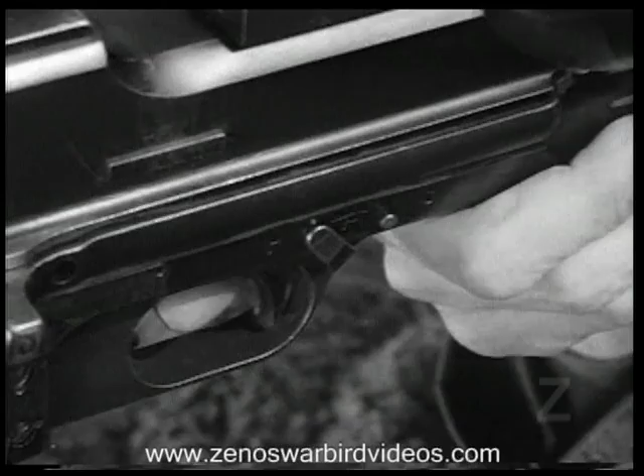You have to get down to facts, technical facts. The Browning automatic rifle, caliber 30, model 1918 A2, is an air-cooled, gas-operated weapon. It uses a 20-round magazine, and you can fire at a slow automatic rate, or if you flick this change lever, you can fire at the full automatic rate.

So much for the description. What we want to find out now is the principle of operation. To help us see how this weapon works, we'll use this cutaway model. Flick the change lever off safe.

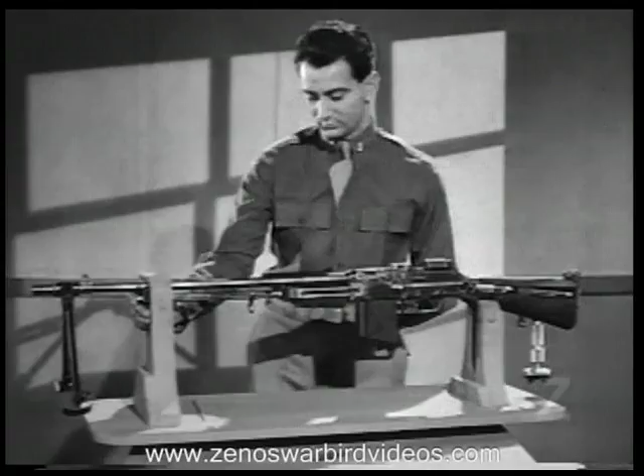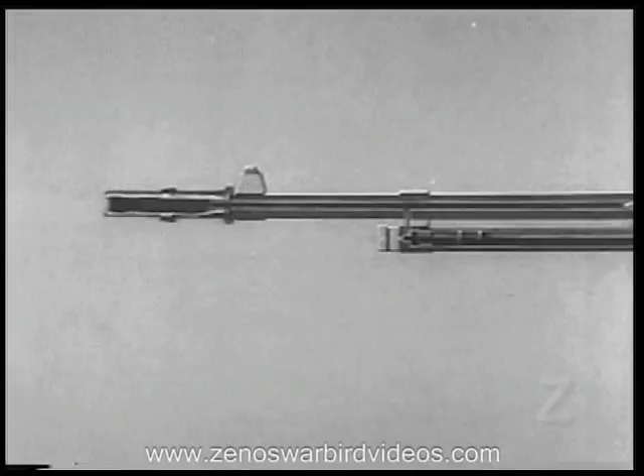We'll start the firing cycle with the cartridge igniting. As that happens, gases travel along the barrel and into the gas cylinder. Now let's use the animated drawing and follow the course of the expanding gases through those labeled parts.

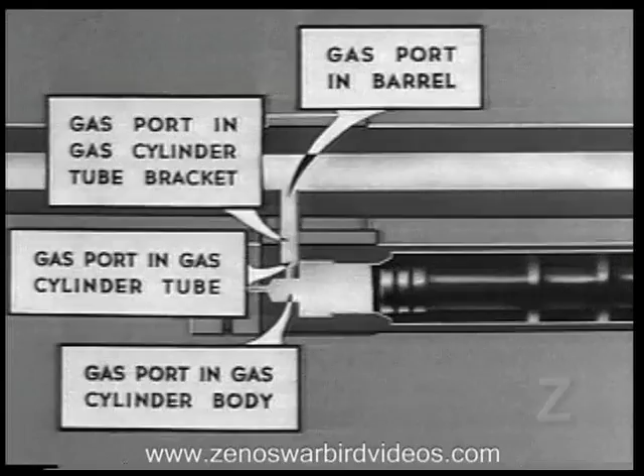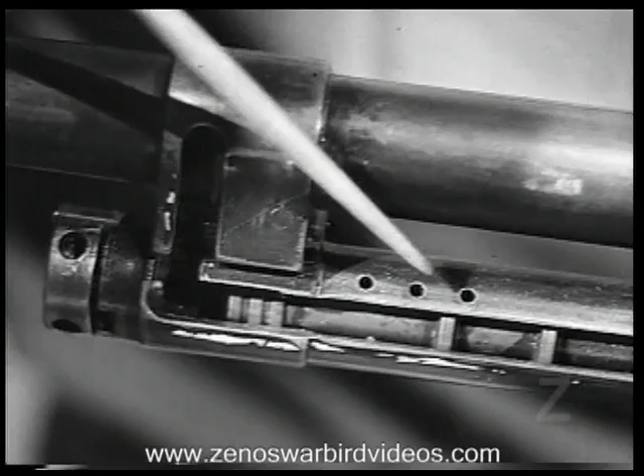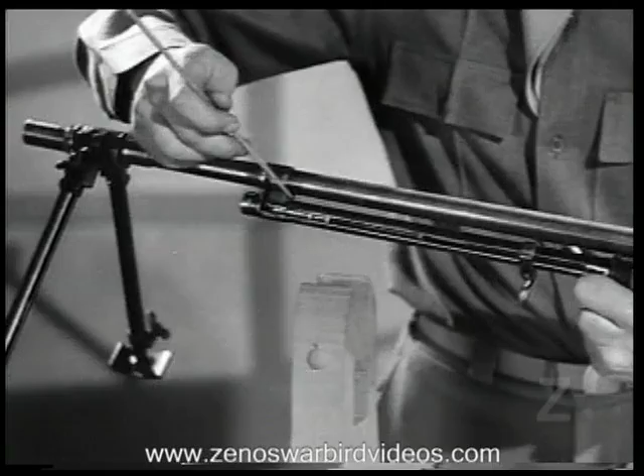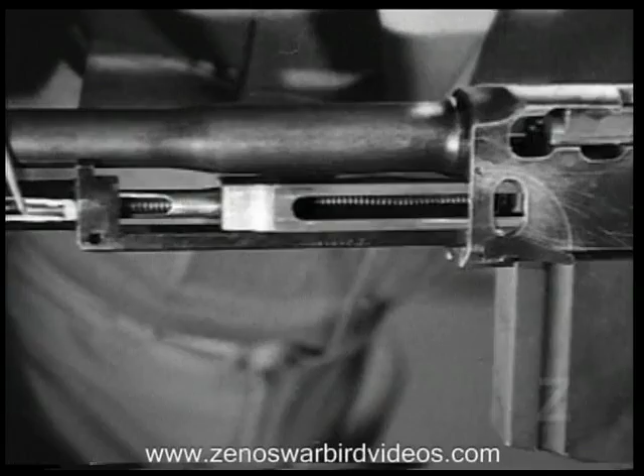Remember, the piston is moving to the rear. It is attached to the slide. This action compresses the recoil spring.

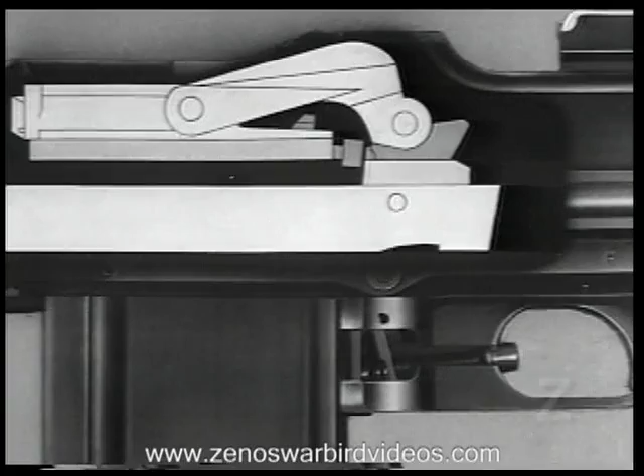As the slide goes back, it carries the hammer back from the firing pin lug, and the hammer pin lines up with the bolt link pin.

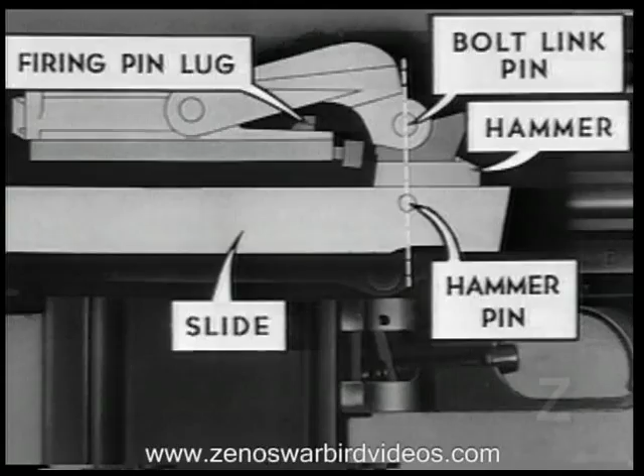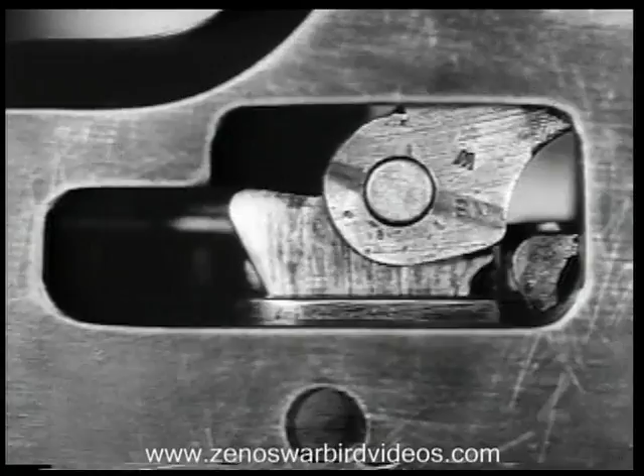Now let's go to the other side. At this point, the bolt is still locked. Now unlocking begins. The bolt link revolves forward about the hammer pin, and the bolt lock is drawn out of the locking recess.

Look closely and note how the lock is braced by the bolt link and the rear of the bolt support.

Initial slow extraction starts as the lock cams out of its recess. Then the case is further loosened when the lock cams against the bolt support.

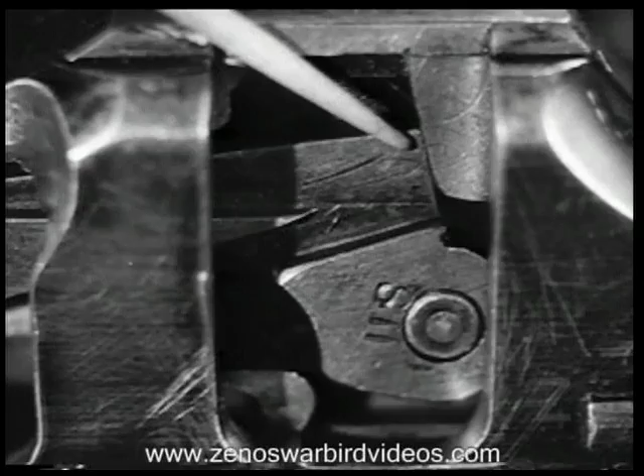At the same time, the firing pin is drawn from the face of the bolt by the camming action of this surface in the bolt lock against a similar cam surface on the firing pin lug.

Now in animation from the other side. Since the bolt hides most of this action, let's remove it and watch the camming action again.

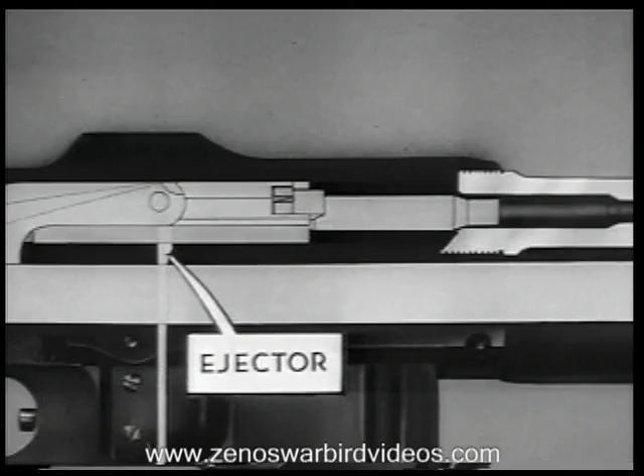Now extraction and ejection takes place. The cartridge case is pulled out and drawn to the rear, held by the extractor. Then the cartridge strikes the ejector, pivots about the extractor, and is thrown out of the receiver.

The slide strikes the sear release, and finally the buffer, which absorbs the remaining recoil. Watch it in animation.

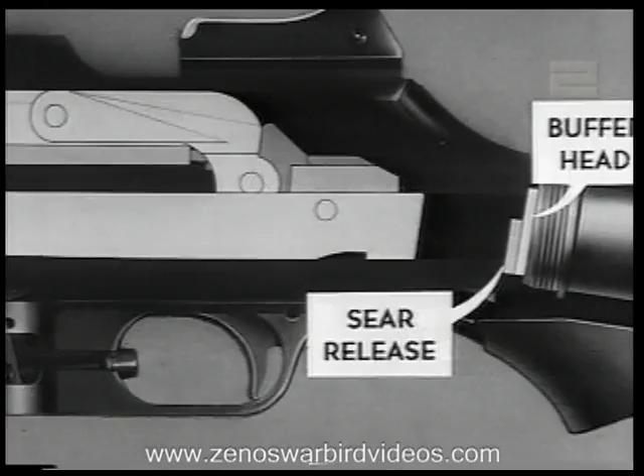Here's how the buffer works. The buffer head is struck by the slide and forces the friction cups over the friction cones, compressing the buffer spring.

In the forward movement, the action of the bolt link, hammer, and bolt lock is the reverse of the rearward movement.

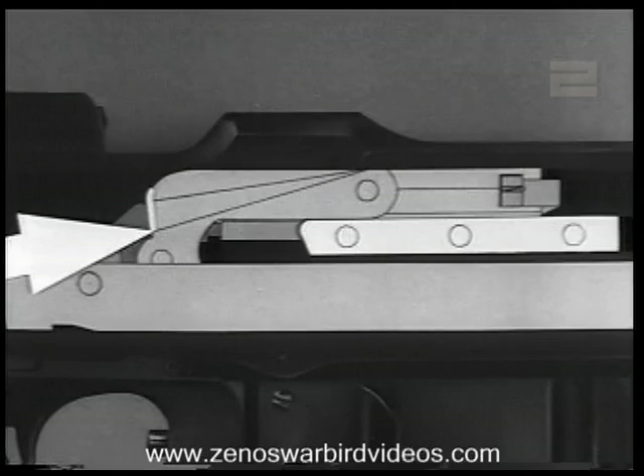As the slide moves forward, the joint at the bolt link is prevented from buckling downward by the tail of the feed rib, by the locking surface of the bolt lock, and by the bolt guide and bolt support.

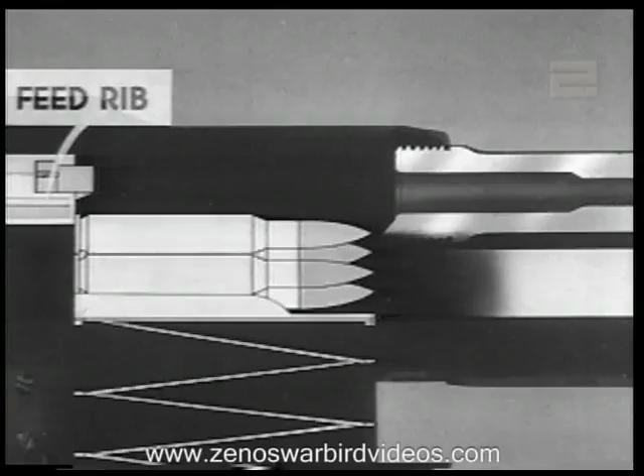When the slide is moved about a quarter of an inch, the front end of the feed rib strikes the cartridge and it starts out of the magazine.

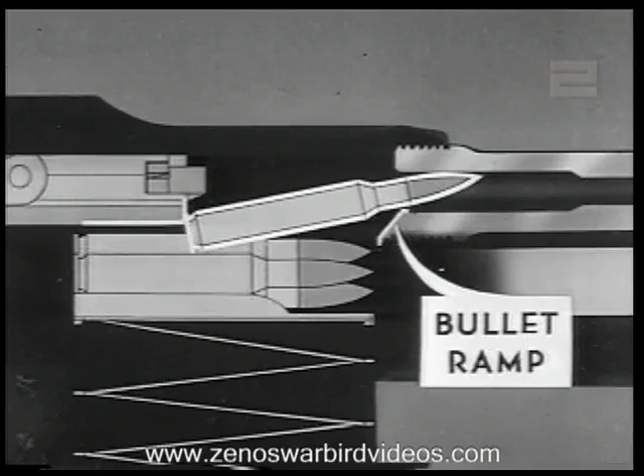The cartridge strikes the bullet ramp and is deflected up toward the chamber. Then it's forced out of the magazine by the bolt. The bullet slides up the face of the bolt and under the extractor. Then the bolt is locked as it continues forward.

Now let's see that in detail. The bolt lock rides over the rear shoulders of the bolt supports, and the rear end of the bolt lock is cammed upward.

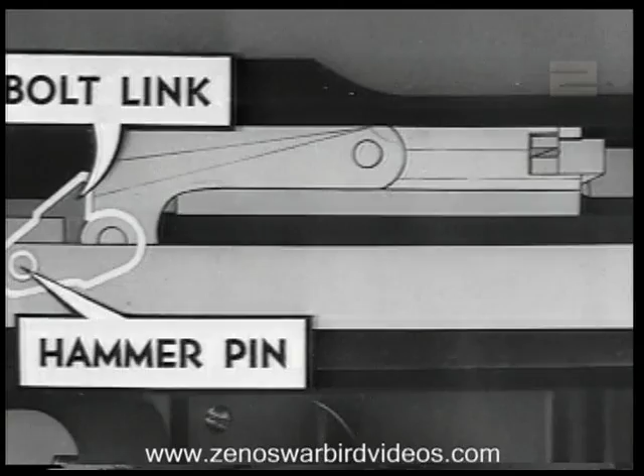Now the bolt link revolves backward around the hammer pin. Remember how the firing pin is enclosed in this slot in the underside of the bolt lock.

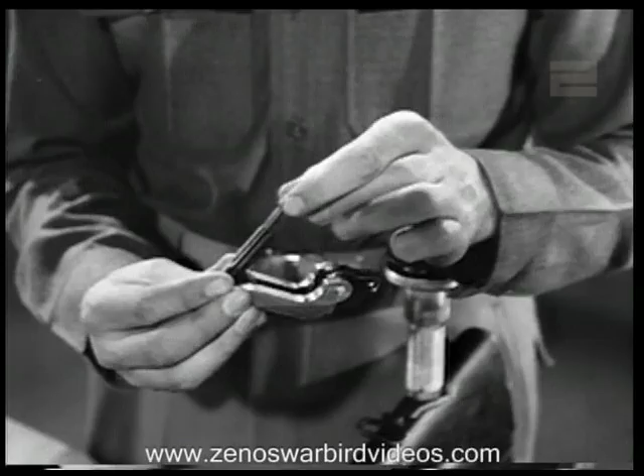As the bolt lock is cammed up, the firing pin is freed by the bolt lock. The slide and hammer move on, carrying the hammer pin past the bolt link pin. The center rib of the hammer strikes the firing pin, driving it forward, igniting the round. This cycle will be repeated, and the rifle will continue to fire as long as the trigger is held back.

Before seeing the trigger action in the 2 rates of fire, let's look at the change lever in its 3 positions: safe, full automatic, and slow rate of fire.

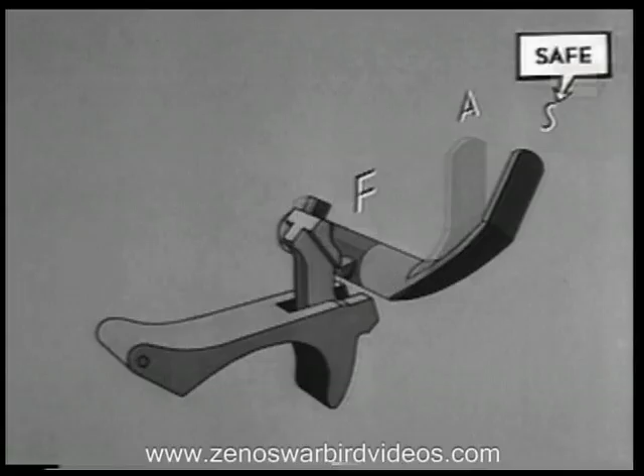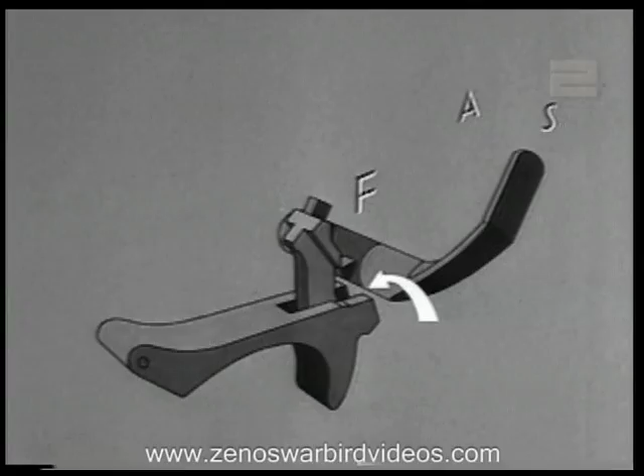In the S, or safe position, the heel of the trigger is blocked by the solid body of the change lever. In the A, or full automatic position, the heel of the trigger rises into the slot in the change lever, and the toe of the connector is blocked by a projecting lip.

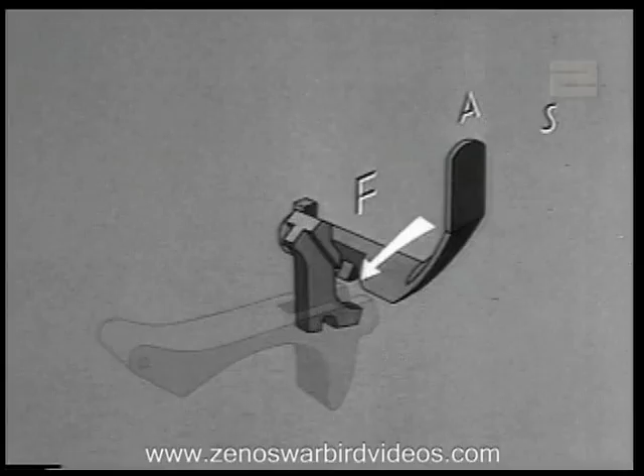In the F, or slow rate of fire position, the body of the change lever is cut away and allows the trigger and connector to rise to their highest points.

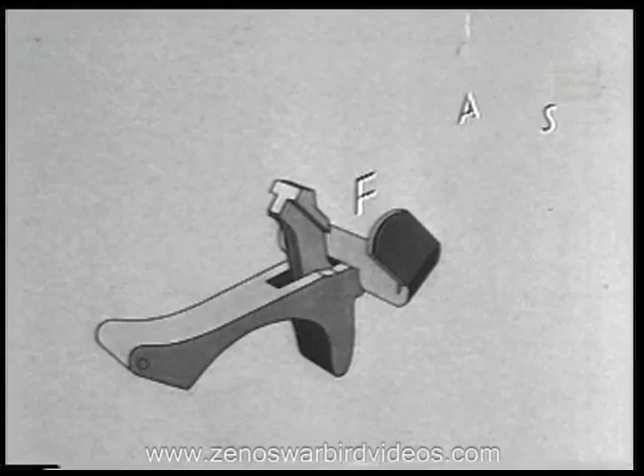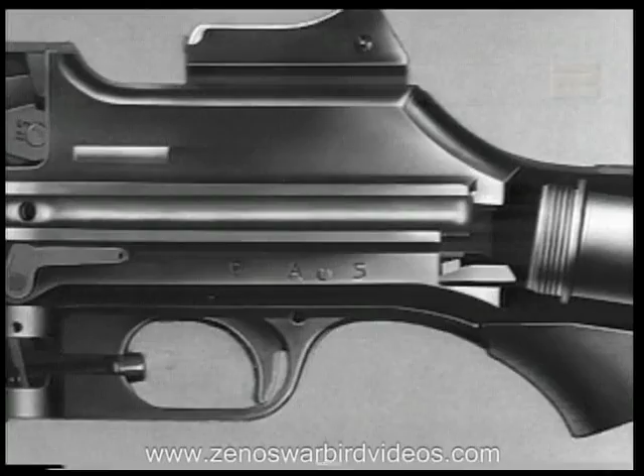Now let's see the difference in action between the full and slow rate of fire. At the full rate, the change lever spring holds the lever in this position.

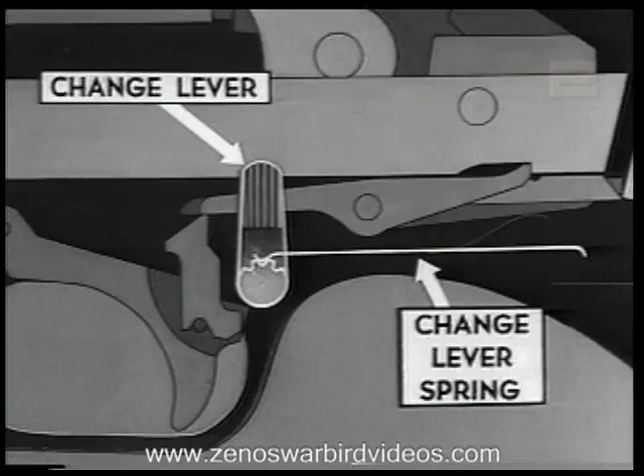This part, the connector, is held against the sear and keeps the sear nose depressed, so the rifle will keep firing until the magazine is empty or the trigger is released.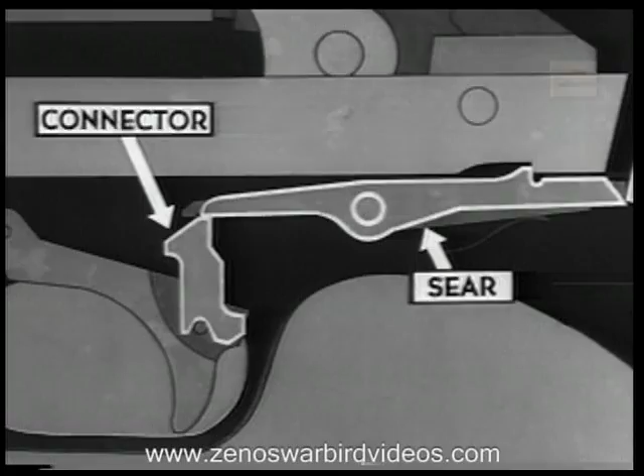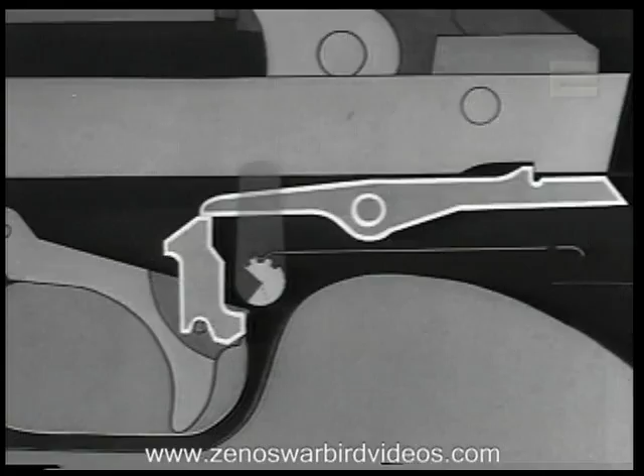Watch this action as it continues, and note that the sear release is stopped from hitting the sear by the stop lever.

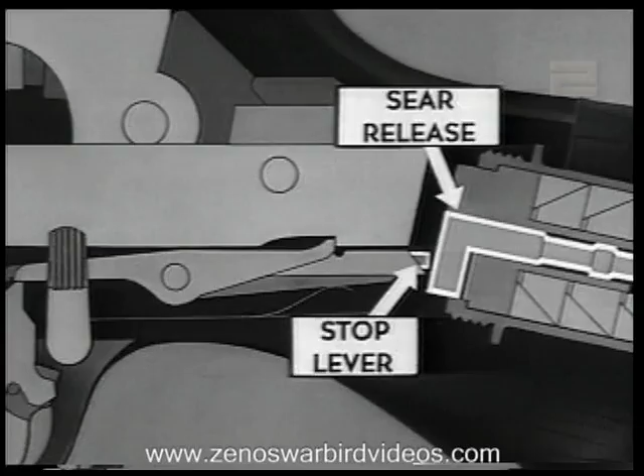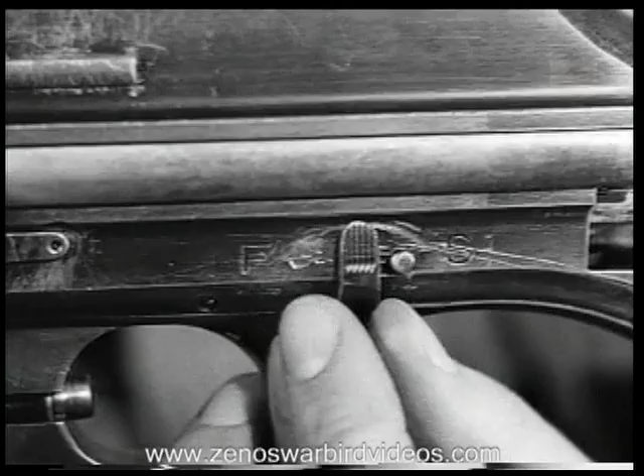That's what happens when the change lever is set at full rate. When it's turned to S, or the slow rate, however, the toe of the connector has more of the slot in the change lever to work in.

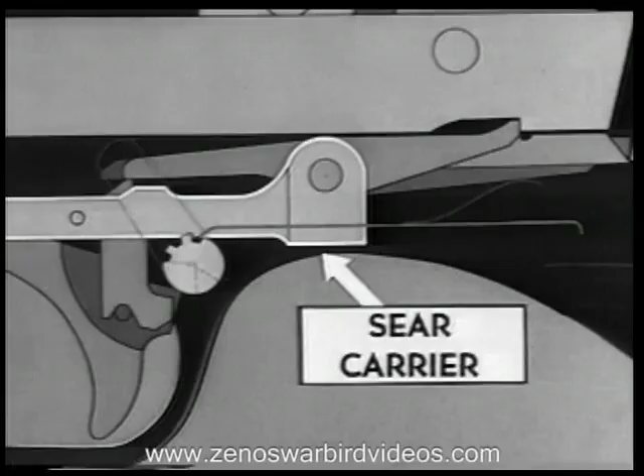Watch how the connector is cammed forward, contacting the cammed surface of the sear carrier when the trigger is pulled. With the sear disengaged, the connector raises the rear end of the stop lever and holds it there.

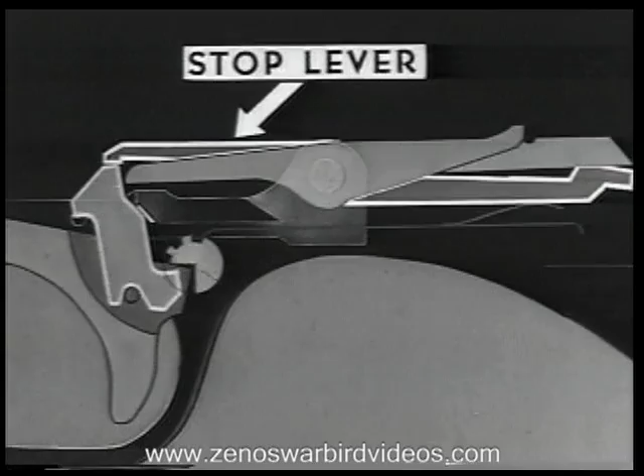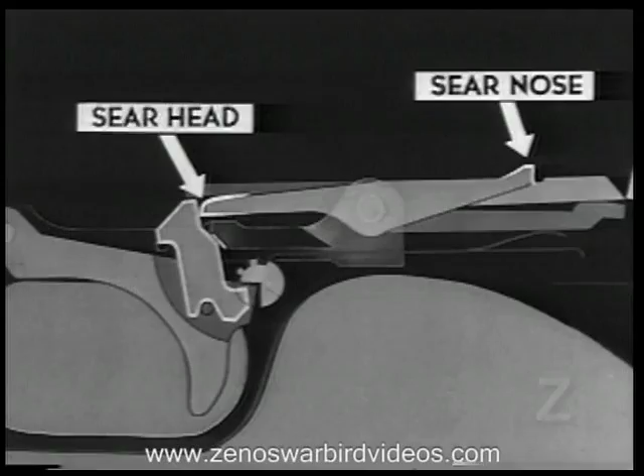Since the sear head is disengaged, the sear nose can now rise, forced up by the sear spring, and engage in the sear notch on the bottom of the slide as it starts forward.

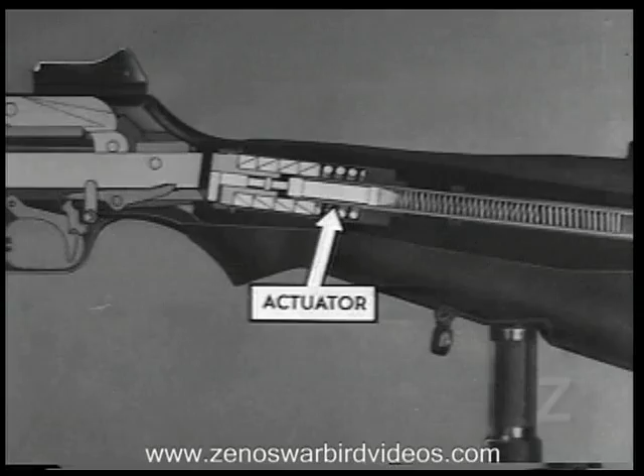Wait. At this point, we'll add the actuator. Now, when the slide hits the sear release, it forces the actuator to the rear, compressing the actuator spring.

Then the slide moves forward and engages the sear nose. Let's get a closer look at the sear cam and the sear release.

The actuator now comes forward, forcing the sear release out of the buffer head. The stop lever being depressed, the sear release contacts the camming surface on the sear and releases the slide.

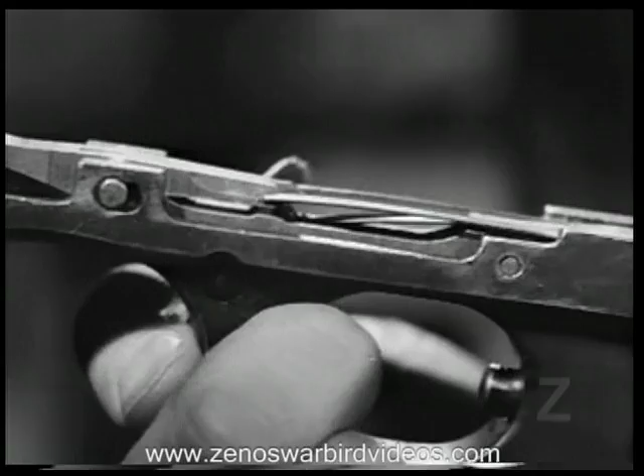With the trigger mechanism removed, we can see what happens now as we release the trigger. The stop lever spring returns the stop lever to normal position.

The center leaf of the sear spring provides tension for the trigger and connector, while the two outside leaves give tension to the sear.

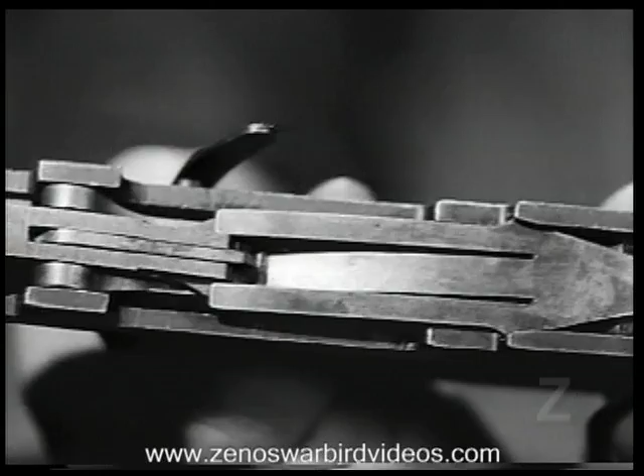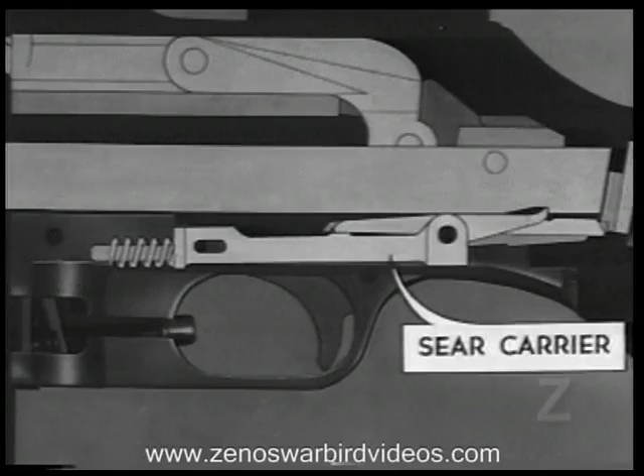Now back to the animation. The counter recoil spring absorbs the shock when the slide engages the sear.

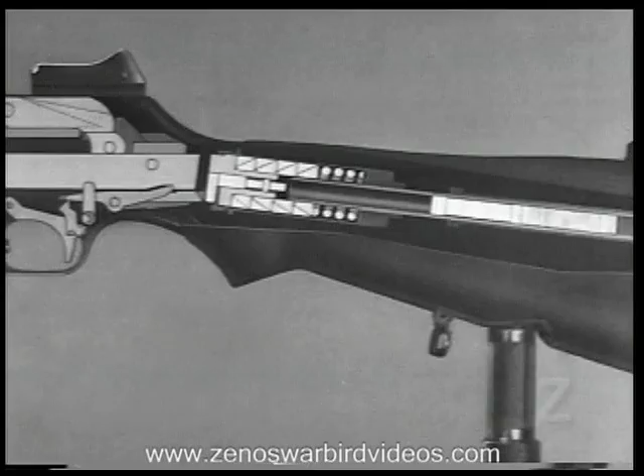All right, let's watch the trigger action once more. First, at full rate. Then, slow rate.

There you have it. Know the firing cycle thoroughly. It will help you locate malfunctions and keep the gun in fighting shape.